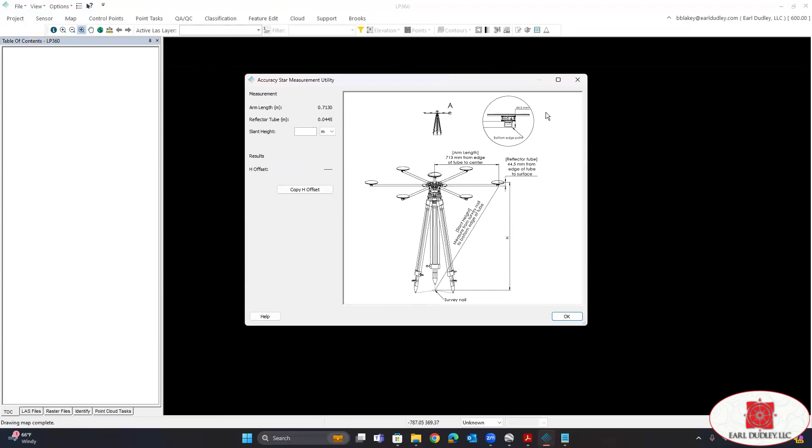We're going to be using that in our check shots. So when you get your H offset, we will add that to our, in this case, go back to—for this tutorial, we had our accuracy star set up just like in the diagram here.

We had our tripod and base set up over our control point. And with that being said, you can see right here, check shot number 100 is actually our control.

So we're going to add in 2 additional columns. We're going to have one column for the type AS, which is accuracy star, and column 6 will be the H offset. Now, if you include your control with your check shots, you'll need to make sure that every line has the same number of columns or it will not import correctly.

So here you can see we've got our vegetated shots. Here is our control. And then here are our check shots.

All right, we're going to go to sensor, cycle import. And we're going to import flights into new project. Next. Oops, got to make sure you choose TrueView / microdrones. Next.

Click the ellipsis, find a place to save the shape file. Next, delimited, next, select your delimiter, next.

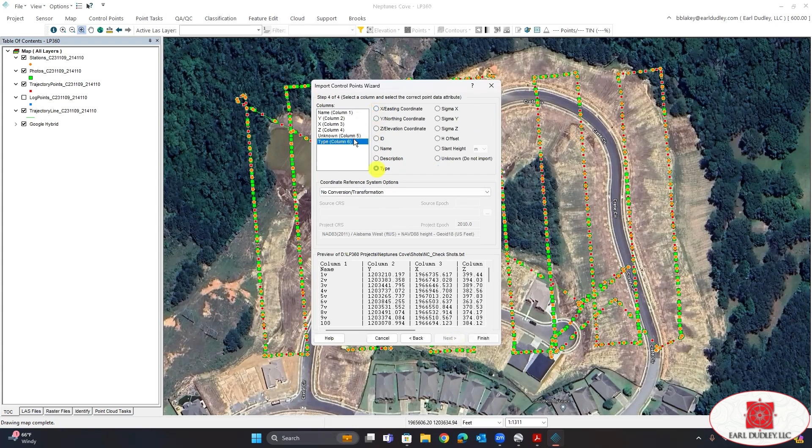And now we need to title our columns. So column 1 is name, 2 is Y, 3 is X, 4 is Z, 5 is type, and 6 is our H offset. Finish. There we go.

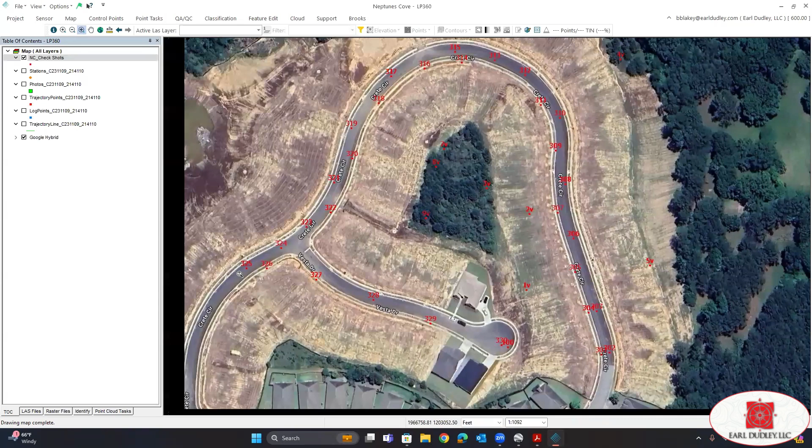All right, perfect. All right, next thing we're going to do is we're going to go back to the sensor ribbon menu, click trajectory processing.

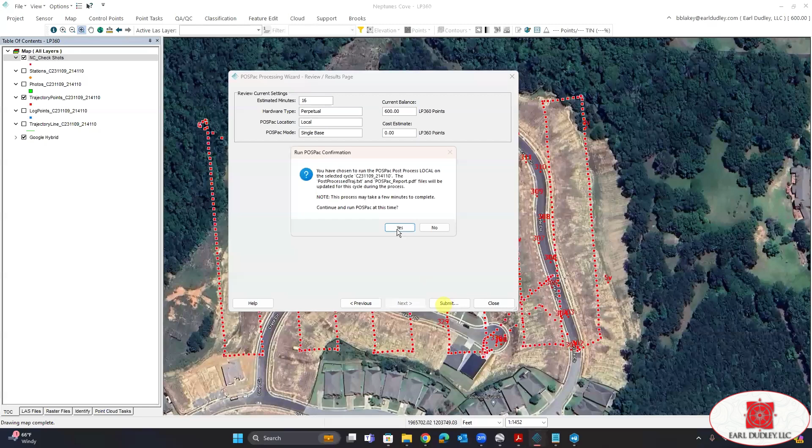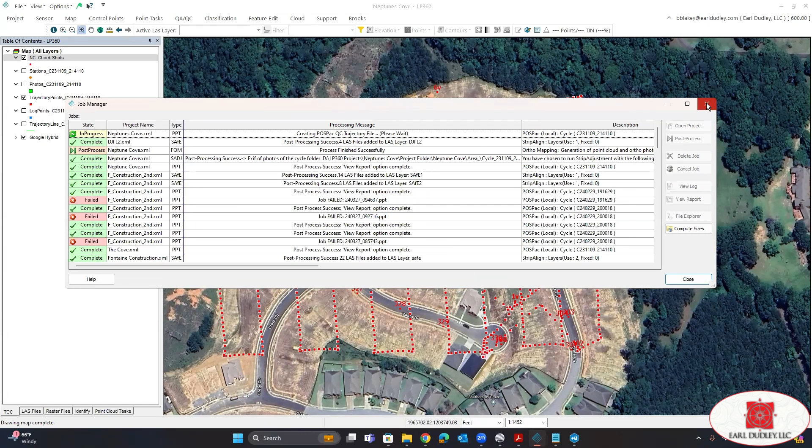Click next. Now we are going to enter our control point. All right, we see that trajectory processing is finished. Post process, we're going to highlight that, then click post process.

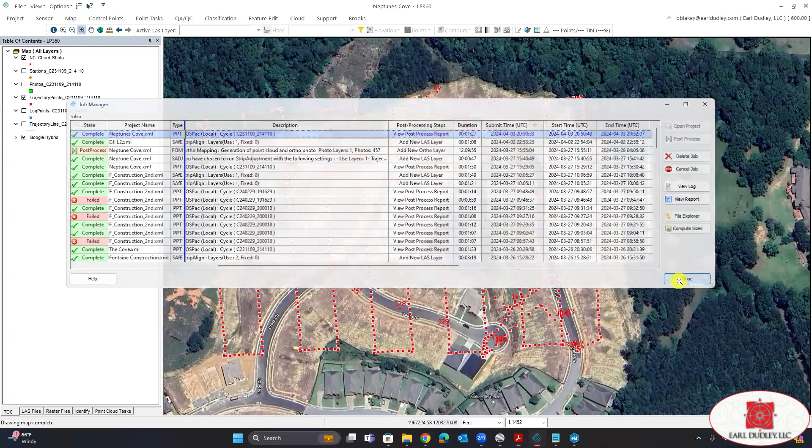All right, next thing that we're going to do is we're going to go create our flight lines. There's several ways we can do this, either auto create or manually. We click auto create. We're going to need to set up our minimum length, turn radius, and deviation. We did 150 feet minimum length, turn radius 10 feet within turn, and maximum deviation of the flight line 10 feet. We click compute. And we now have our flight lines.

Now, if you're not happy with what you see, we can just go ahead and delete these guys by going up to feature edit and then using our lasso. And I'm going to hold down the left mouse button. We click the delete key on my keyboard.

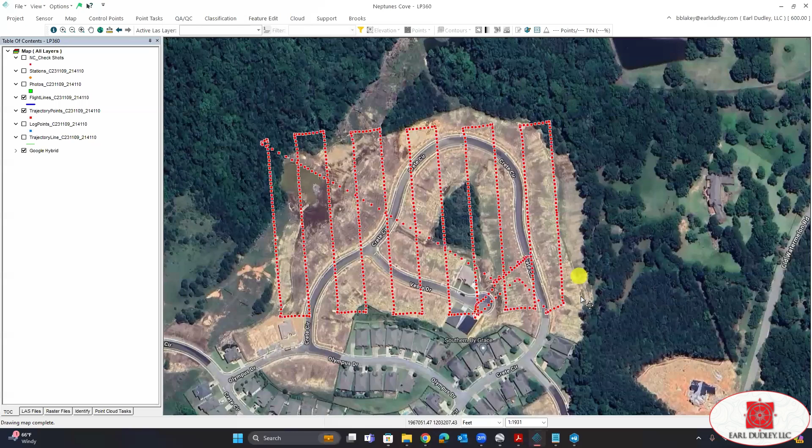Yes. And then now open up our trajectory points, and we can do this manually. Go to feature edit, select edit polygon. And I want to make sure that I got all my check shots in there. Yeah, I got some that are going to be pretty close right there.

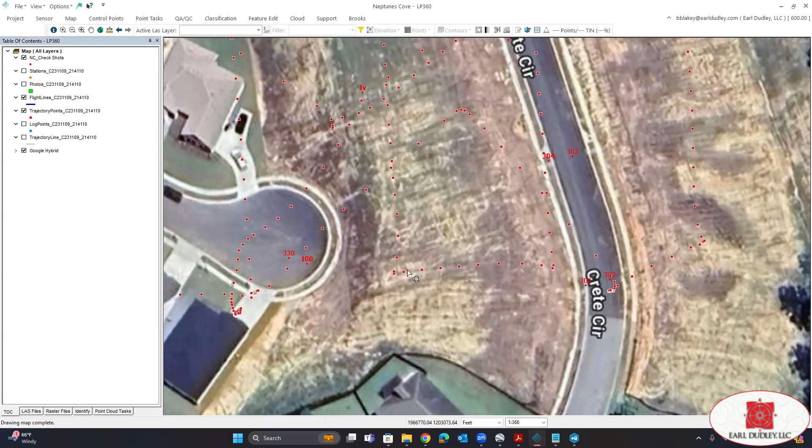So we're going to left click, left click, left click, left click. Oops. Make sure you got it selected here. All right, let's do this again.

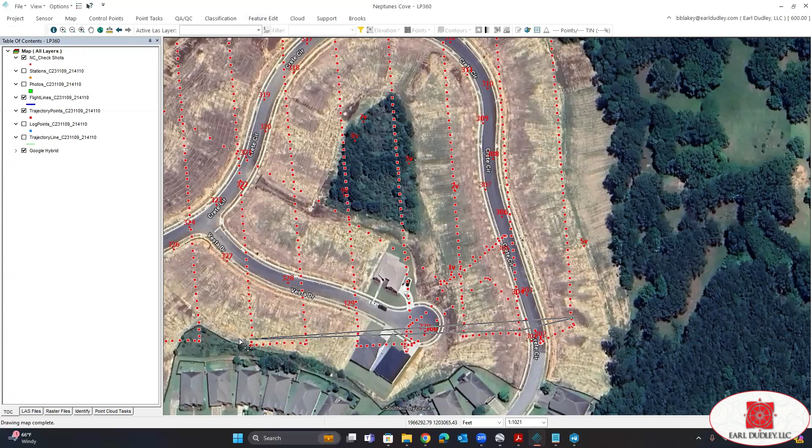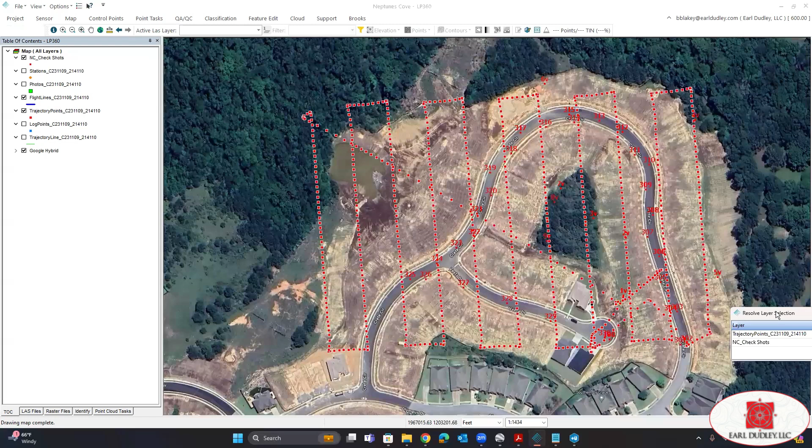When you're done, just double left click. I'm going to ask which layer do we want to select, and we want to select the trajectory points.

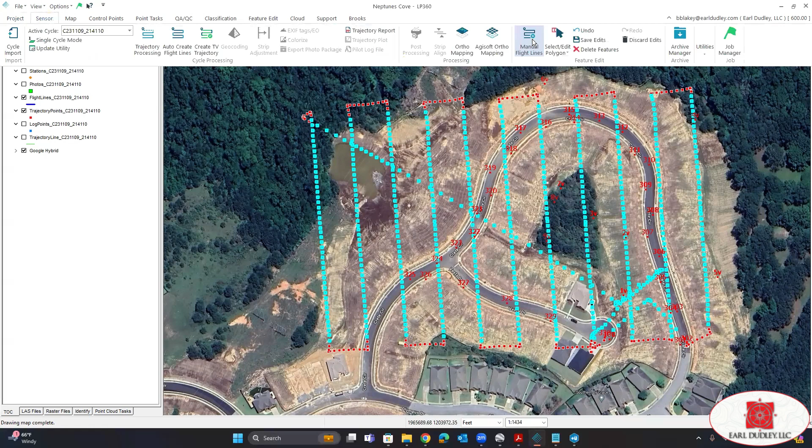Now we're going to go back to sensor... project. Where is it? It was moved. Sensor. And we'll see manual flight lines right there.

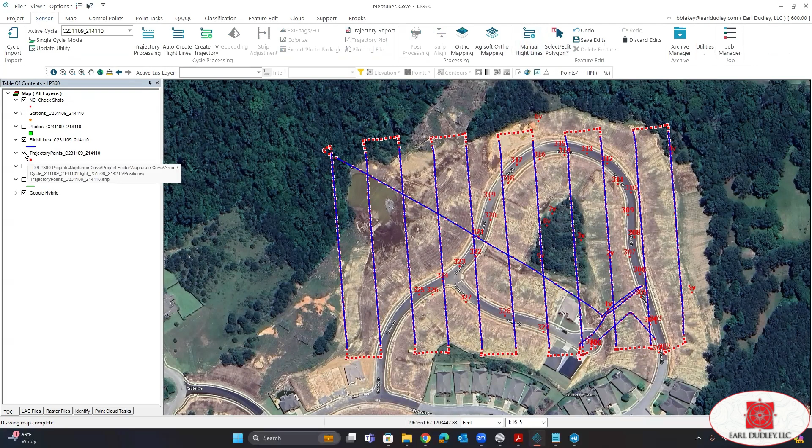There we go. What we want to do now is turn off the trajectory points in our table of contents on the left, and we want to get rid of these guys. All we want are these parallel lines.

Same thing, just use my feature edit tool. Tell it what we want to select, those flight lines. Hit delete on our keyboard. And then last, we want to go up to the feature edit.

We can see that our active layer right here is flight lines, and we want to make sure that we save that.

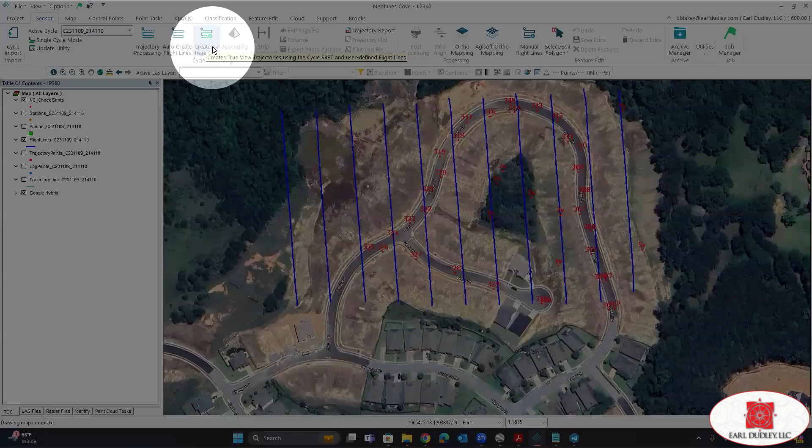Okay, we're going to go back to sensor, and then now we're going to hit create true view trajectory, create trajectories. Okay, you can see that our trajectory files have been generated. We're going to click OK.

Now, if you are using a third-party program such as Pix4D for your ortho, at this point, you can go ahead and export your photo package right here.

We can go ahead and actually, we don't need to do the updating of our EXIF tags because we did that when we created our trajectories. So we can go ahead and export photo package, find wherever you want to save it to.

And export photo package. Now we can see here's our photo package, and it's got all of your corrections ready to go. You would just import this as you normally would any other corrected data set into your third-party orthophoto software.

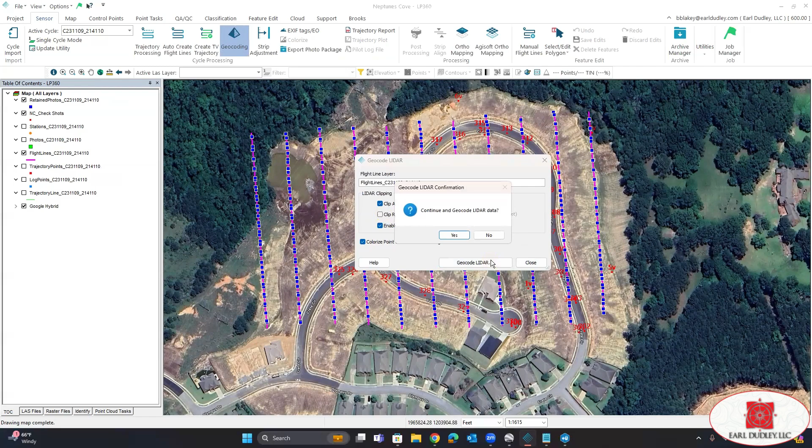Now we're going to turn off clip range, enable true track, and colorize point cloud. Click geocode LiDAR when you're ready, and yes. It's been generated. Next thing we're going to do now is run our strip adjustment.

So go ahead and click the strip adjustment icon. Tell it that we want to run it on our LAS layer that was just generated.

We're going to use the same clip angle. Really, we're not going to change anything here, but just give it a different name. And I usually just call it the adjusted point cloud.

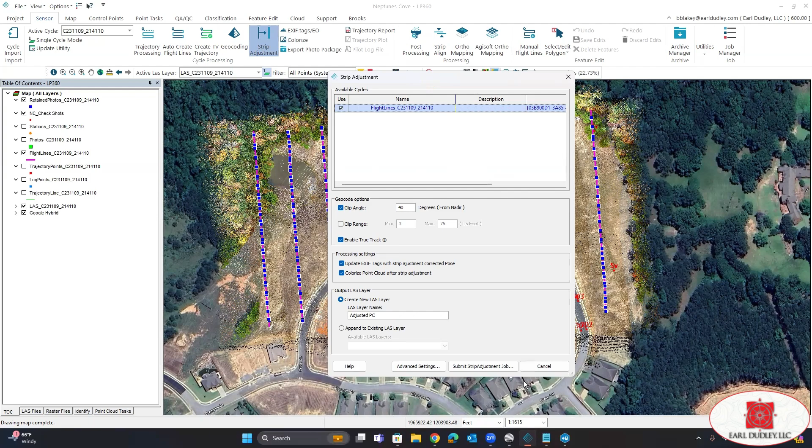Submit strip adjustment, and yes. All right, we can see in our job manager that our strip adjustment is completed.

Highlight it, and then click post process. All right, see our trajectory file has been generated.

Now we can see down here in the bottom left-hand corner, it is now geocoding our point cloud. All right, we can see that we've gotten a success, so we're going to click OK.

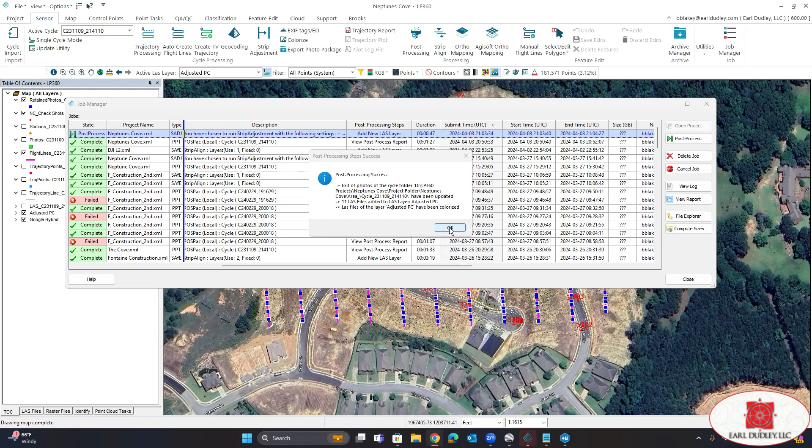And we are ready to close our job manager. And if we look over in our table of contents, we can see our new point cloud. And our active layer, we have our adjusted point cloud as well.

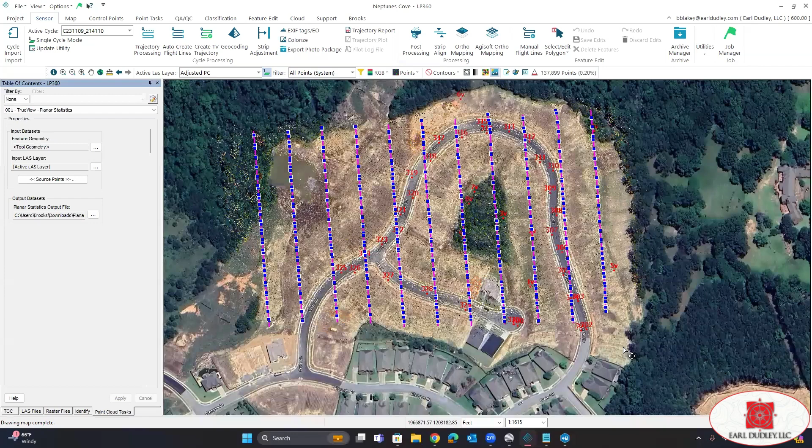All right, next step we're going to run is our smoothing. However, before we do that, we can go ahead and import our border, or actually create one, and then we can run our smoothing task afterwards.

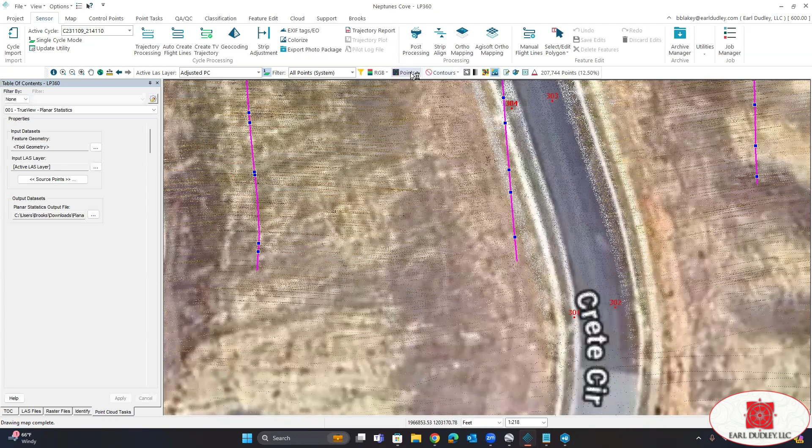Okay, to create a project border, we're going to go to Feature Edit, create feature layer, browse, and set up a location where we want to have our border.

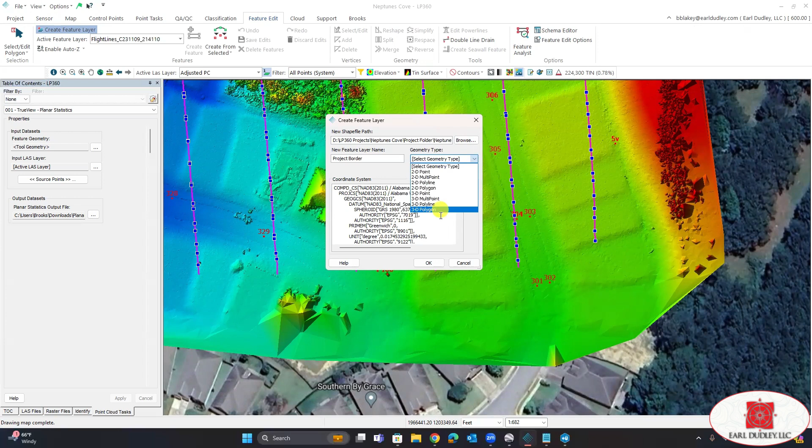And our geometry type is going to be 3D polygon. Next thing we're going to do is click Create Feature, and left click wherever you want to start your project border.

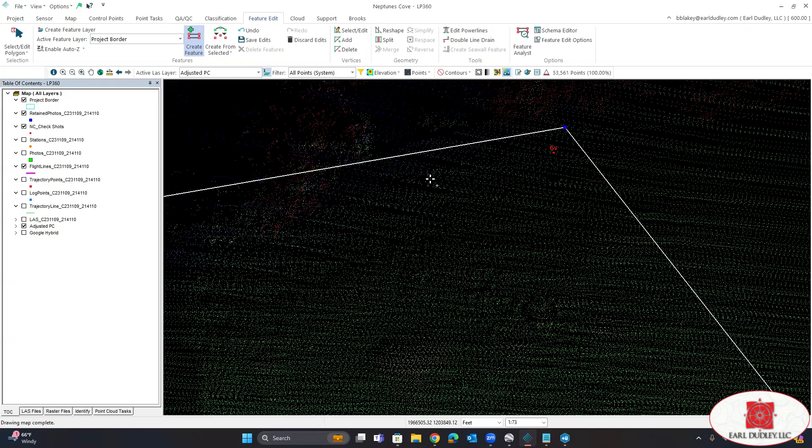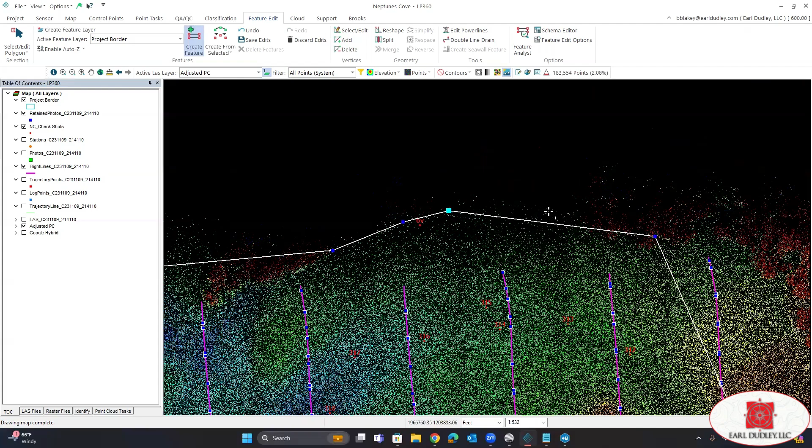Then when we're done, we'll just double click and then go up here to save edits.

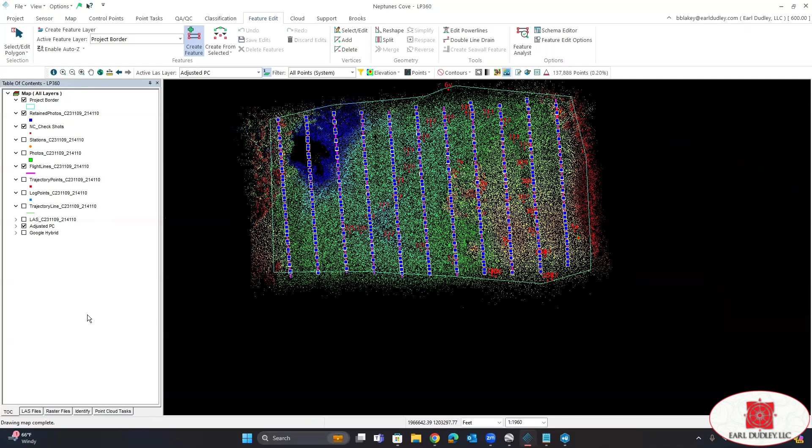All right, next thing we're going to do is go back to our table of contents, click point cloud task, and then a drop down menu. We're going to select the smooth point cloud task.

Click the ellipsis here. We want to make sure we have shape layer and the shape file that we just created. In this case, it is project border.

Active las layer, which is going to be the adjusted point cloud. And then our source filter, we just want to make sure all points are selected. If they're not, just in the drop-down menu, select all points.

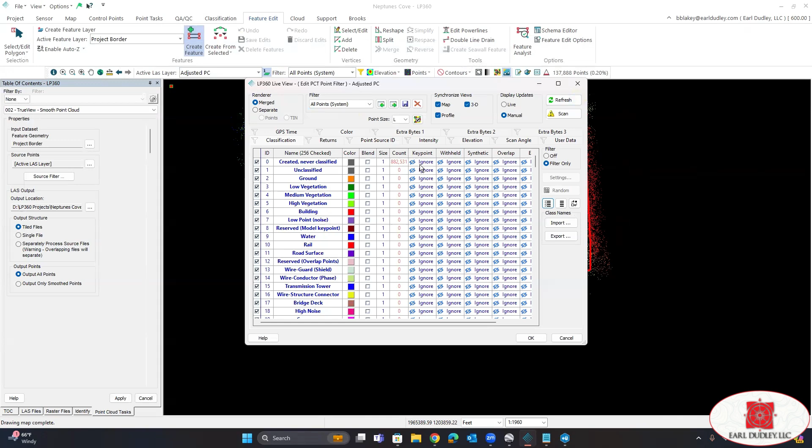If we hit the refresh, we can see nothing has been classified. Now we're going to set up an output location.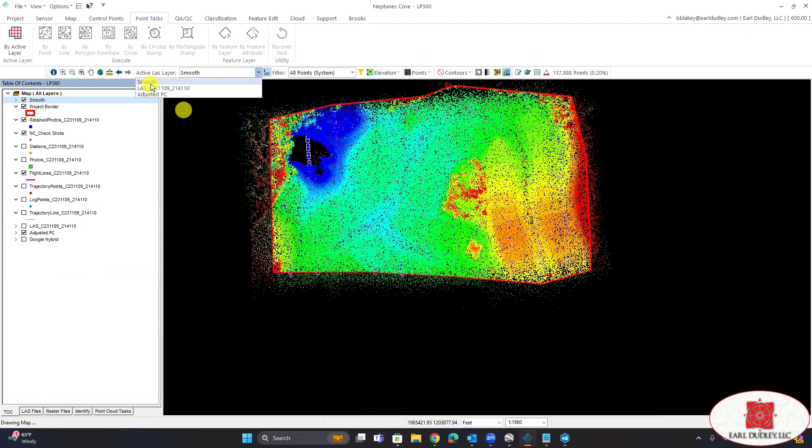Now we're ready to start checking our accuracy. We're going to go to control points, accuracy estimation, settings, source points, and we want to make sure all points are selected. Since nothing's been classified, we can also choose created never classified. Our radius, we'll do 1 foot, click OK.

The first thing we want to do is tie everything into our control. So in the drop-down menu here, we're going to find our accuracy star. There it is right there. Now click auto find. We can see that LP360 found our accuracy star, and we have very good, reliable results. Actually, we're tied in pretty close already.

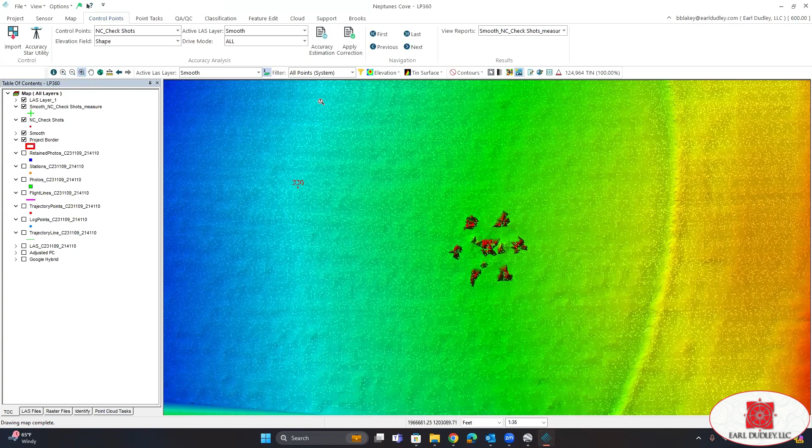To get everything tied in precisely to our control, what we're going to do is just click solve, then apply correction. Click OK, and we look over in our table of contents, we can see that we have our corrected las layer. So in the drop-down menu, we're going to select las layer 1, then come over here and rename this guy. I'll call it corrected accuracy star.

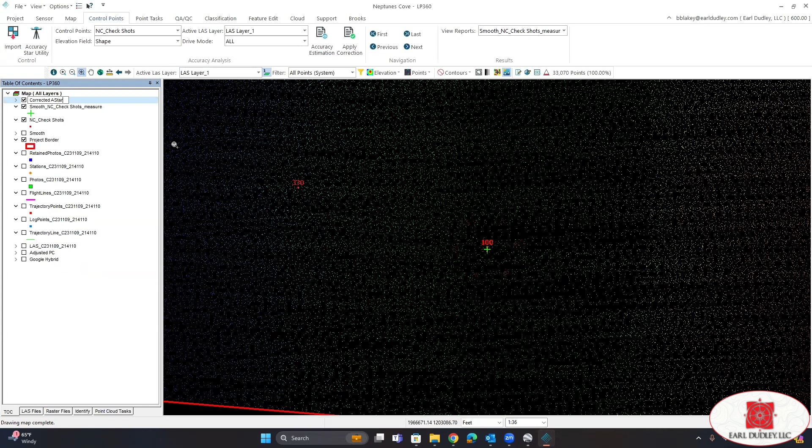We're going to run this again, just to confirm everything tied in the way it should to our accuracy star. Everything looks pretty good. So the next thing we're going to do is in our drop-down menu here select full check and auto find.

Look at our mean error, it's right around a half inch. Deviation is around a hundredth. Our vertical spread is just under six hundredths. We can see our minimum and maximum error, both of which are within the accuracy of the sensor, our error range. We have our RMSE, our accuracy class, and our contour interval.

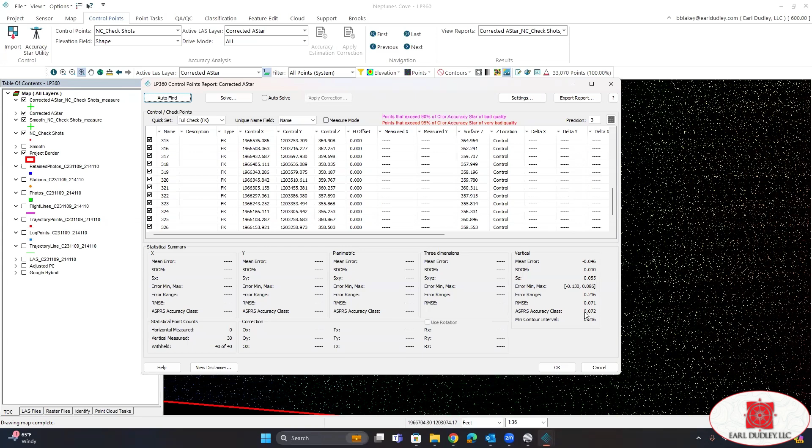Just to confirm, the way this RMSE is calculated has not been updated with the latest ASPRS accuracy standards that came out in August of 2023. So to get that, we would square our RMSE of our check shots, square the RMSE of our data set, add those together, and then get the square root of the sum.

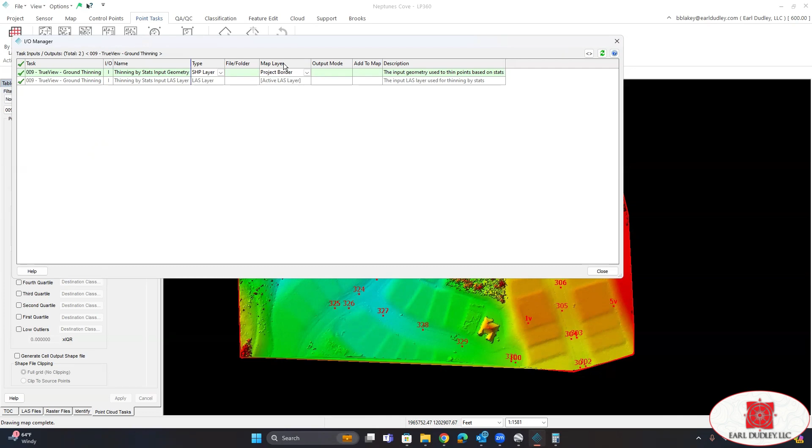Okay, we're ready to go ahead and begin classifying our point cloud. We're going to click Point Cloud Task, and in the drop-down menu select ground thinning. Feature geometry layer is going to be the shape layer and the name of your boundary. Units meters. We want to have active LAS layers selected, and the source points we want created, never classified.

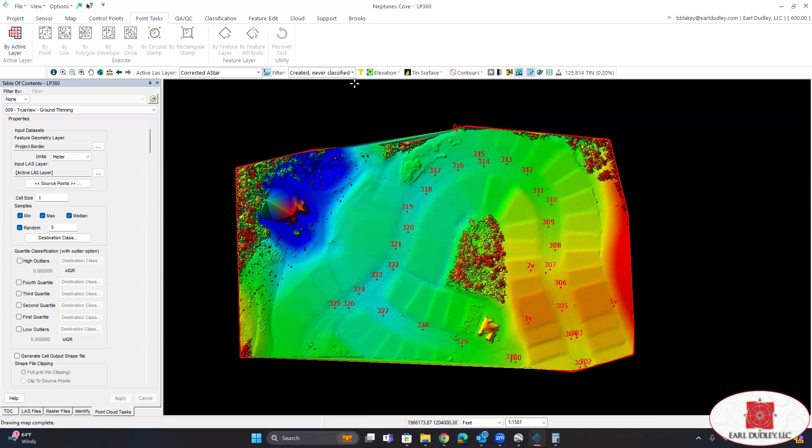We want to have cell size of 1 square meter, and we want 8 points per square meter: minimum, max, median, and 5 random points. Go ahead and click Apply, and by active layer. Click OK. And if we go over to our filter and select Ignored Ground...

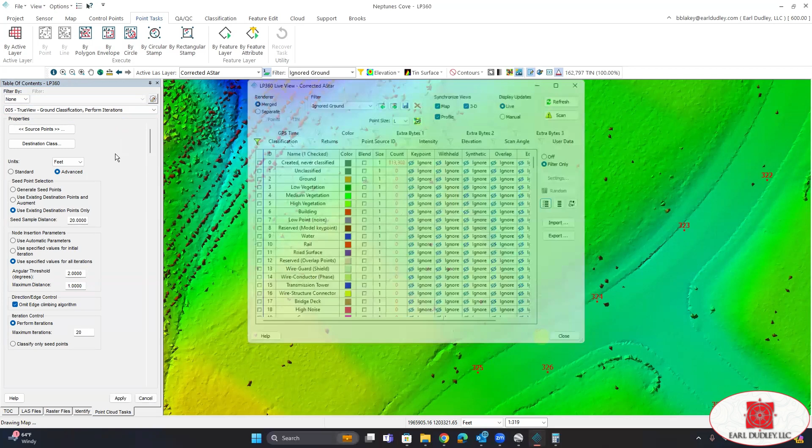You got rid of quite a bit, but still a lot going on here. So what we're going to do next is go to ground classification, perform iterations. Source points is going to be ignored ground. Destination class is going to be ground.

We want to generate seed points with a sample distance of 20 feet. Angular threshold, 2 degrees, distance 1 foot, omit edge climbing algorithm, and we want to perform 20 iterations. Go ahead and click Apply and execute by active layer.

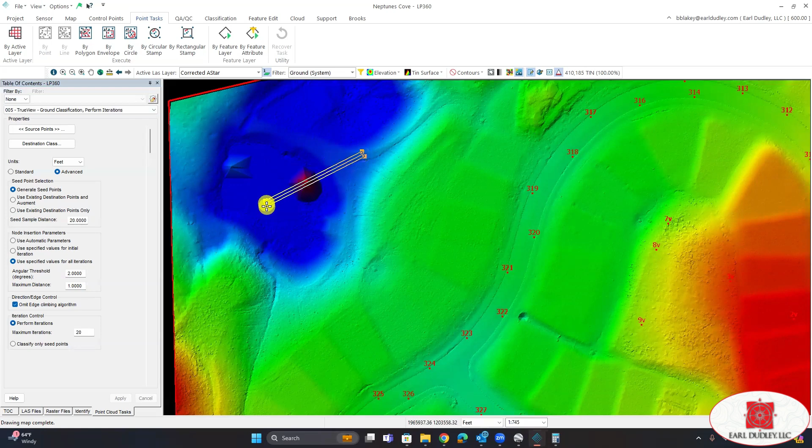Now when we change our filter to ground, just to get rid of these last few bits of vegetation, I'm going to click Draw Profile Line. Now I'm going to left click, use my mouse wheel. There's a point up here somewhere.

There it is. To get rid of that guy, our filter is going to be ground. Source is all points, and our destination will be unclassified.

Next, we want to select the classify above line, and there's the point we want to get rid of. So I'm going to left click, draw a line underneath it, double left click, and then hit the number 1 key on my keyboard.

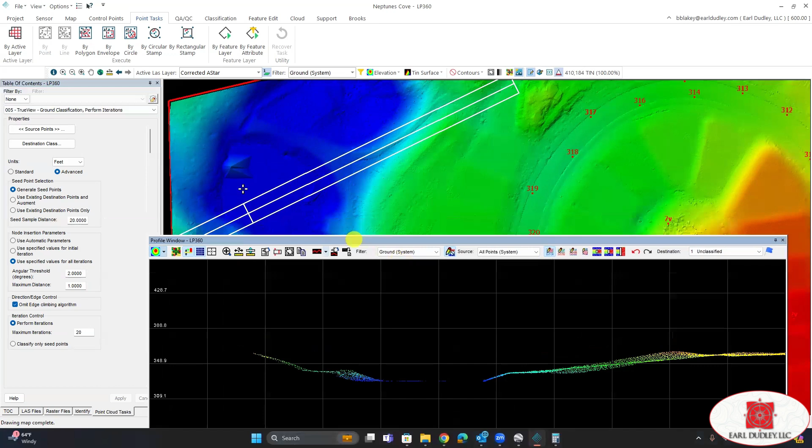And now that reclassified that point as unclassified. So I'm going to go through here and real quickly clean the rest of this up, and we'll be ready for the next step.

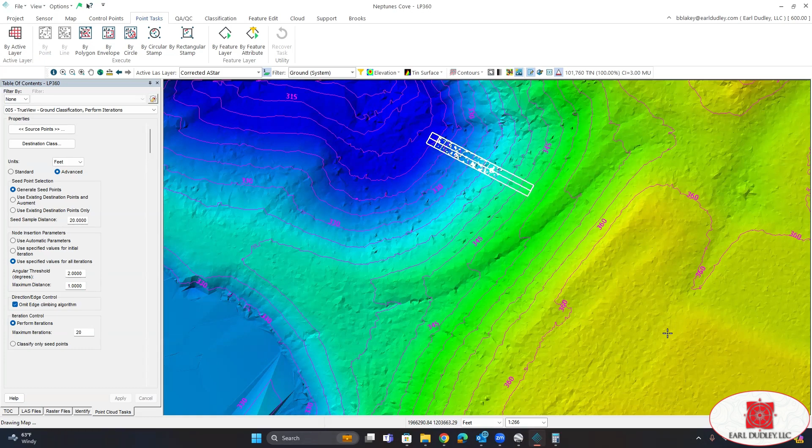So the next step is we'll notice that we did miss a few spots, especially some areas that have sharp edges, such as jogging trails or trestles, things of that nature. With this particular project, we had some piles of, I believe it was some dirt over here.

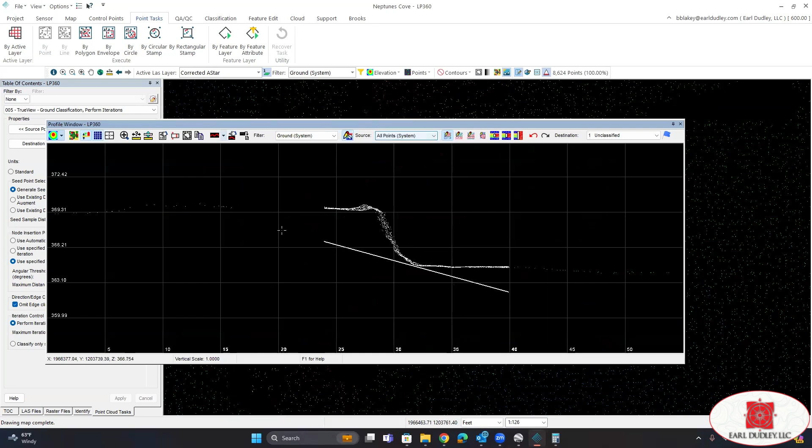And if we turn our points on, and then turn off our contours -- oops, there we go -- I can see that we've got some missing areas, and I'll really be able to see it if I draw my profile line. And we can see that we missed that. So it's really easy to fix.

We're going to use the same tool that we did to classify this, but instead I am going to change my seed sample distance down to around 2 feet. Click apply. And instead of executing by the entire layer, I am going to execute by... I can really use just about any of these, but we'll try the circle here. There we go.

So now when I draw my profile, I can see we're able to get that back in. And if you're not satisfied with the results, we can just make the seed sample distance even a little smaller if needed. We can try even by envelope, and I think that should do it.

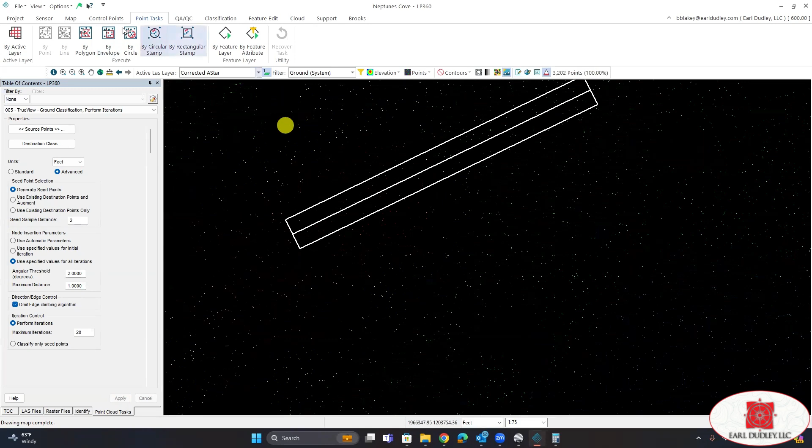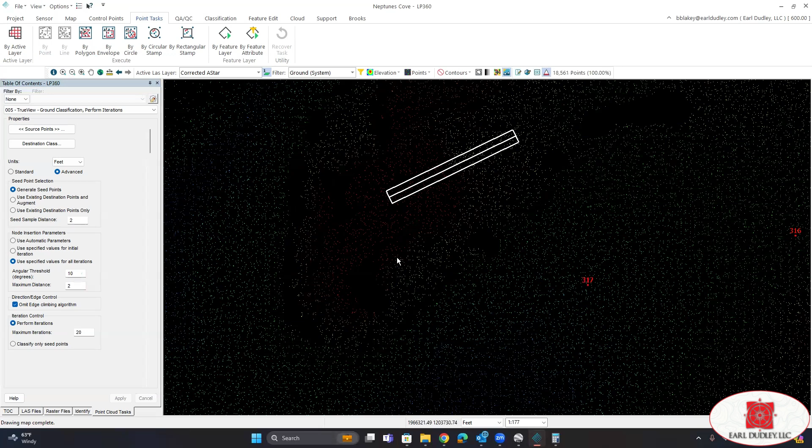Now, sometimes if you've got a really steep angle, you may need to adjust your angular threshold. So we can even try, say, 10 degrees, and maybe even go 2 feet. But you just got to be careful with this, especially if you're in vegetation. This is wide open, so I'm not too worried about it, but if we're in vegetation and you start getting really aggressive with these angles and distances, you could run the risk of inadvertently classifying vegetation. Again, this is fairly open, so I'm not too worried about it.

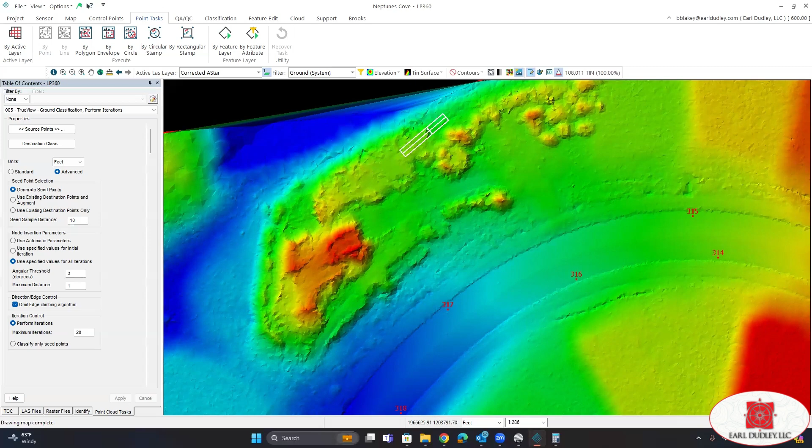Okay, now that we've got the point cloud cleaned up, there'll still be a couple spots here and there that if you put your mind to it, I'm sure you could find stuff you need to clean up. But if you've ever done point cloud classification, you need to know when to say when, because it can definitely be a time robber, no doubt about that.

But we are ready to go ahead and thin this guy out one last time. So we're going to go back to our table of contents, and in the drop-down menu here, we're going to go select ground thinning again. This time we're going to select source points as our ground, there they are, and destination is going to be model key points.

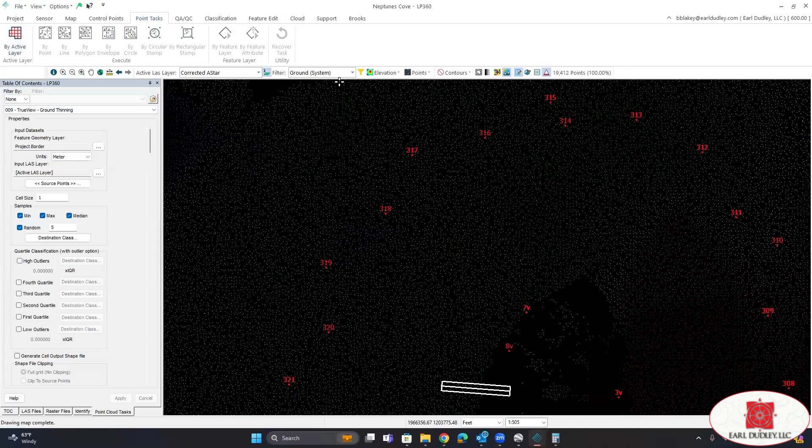Wanted to do 5 points per square meter. Go ahead and click apply and execute by active layer. Change my filter to reserve model key points.

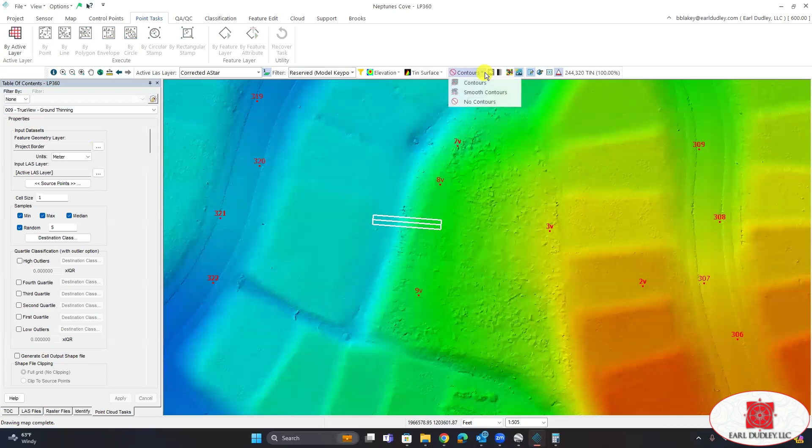Change to TIN surface, and we're going to now turn on our contours on demand. And then over here in our table of contents, we're going to go to our point cloud right there. We're going to right click, go down to properties, symbology, contours.

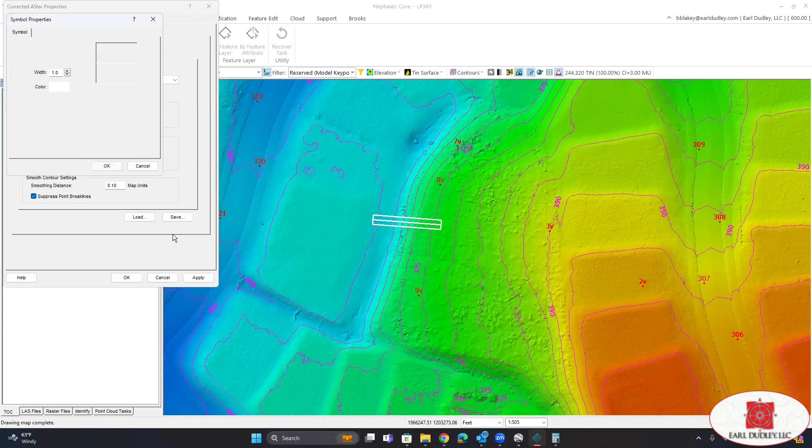And you're going to change this to whatever contour interval that you're going to use. Then your smoothing distance, I usually use 0.10, change that to map units. And I like using the white, they're a little easier to see. Okay, and apply.

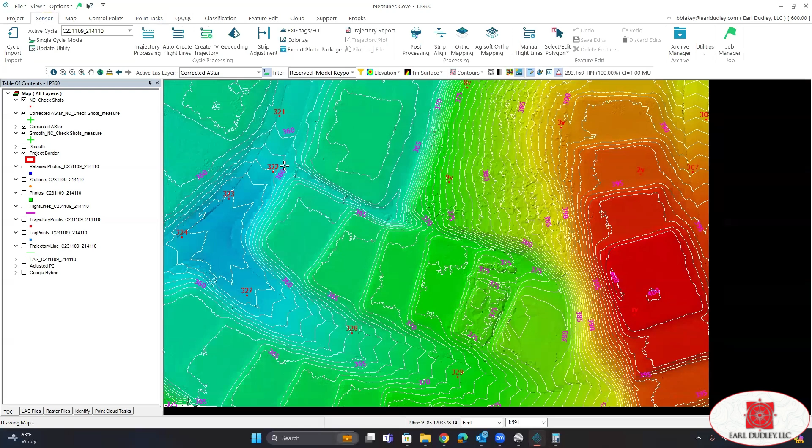So now we can use these to go through one last time and see if there's any areas we need to clean up. We need to check our horizontal. There are several ways we can do this. For those of you that have the Agisoft add-in, let me turn these off real quick.

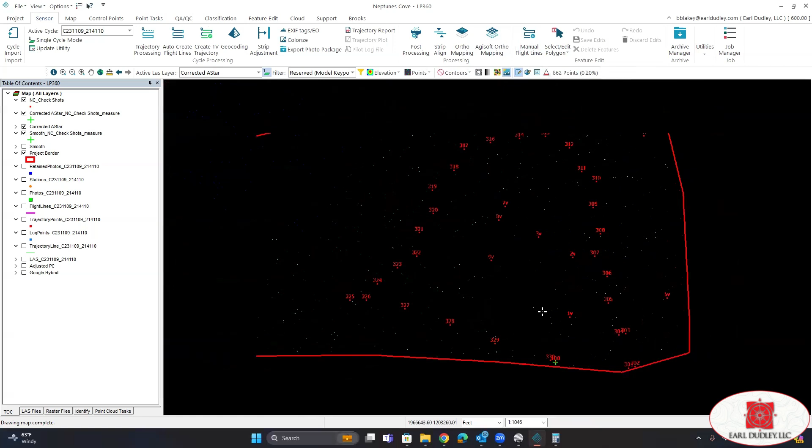We're going to create an elevation model and then create our ortho from that elevation model. So we'll go to Project, Export Wizard, Surface, and then select our model key points.

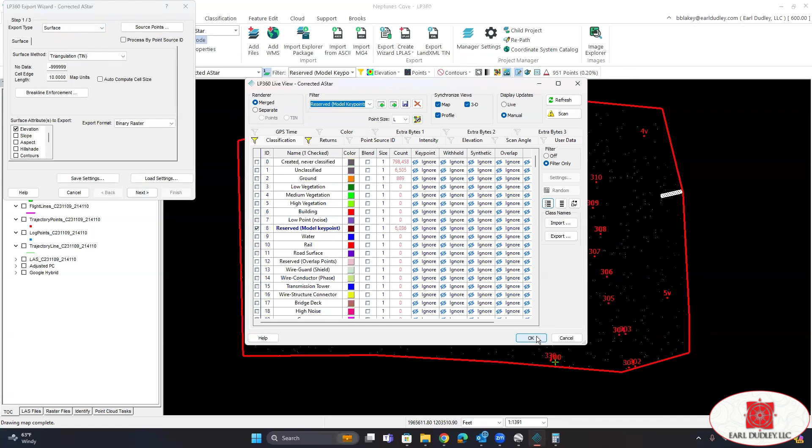We'll do a 1/4 of a foot cell edge length. Export format will be GeoTIFF. Make sure elevation is selected and click next. Cookie cut a polygon - there's our project border. Click next, find a spot to export it to, then click select finish.

Once you have your elevation model, we're ready to create our ortho. From the sensor ribbon, select Agisoft ortho mapping. Retain photos, we want to generate ortho from DEM, and give it a name. If you want to go into advanced settings, you can.

Really, the default settings should be fine. Now if you have a really large project and end up creating an ortho that's maybe too big to manage, you can decrease that size. Just come in here, unselect optimal ground sample distance from images, and put in a higher ground sample distance that will lower the resolution as well as the size of the GeoTIFF.

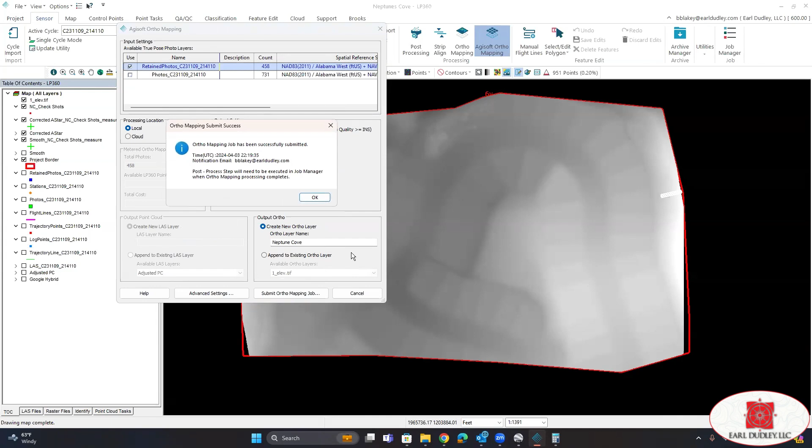Once you're ready to submit, just click Submit Ortho Mapping Job, then click OK. Another good thing about this workflow is it will create your ortho in a fraction of the time. If I can find one here for this project - with 8.5 minutes, I've already got it created. I'm going to go ahead and bring it in.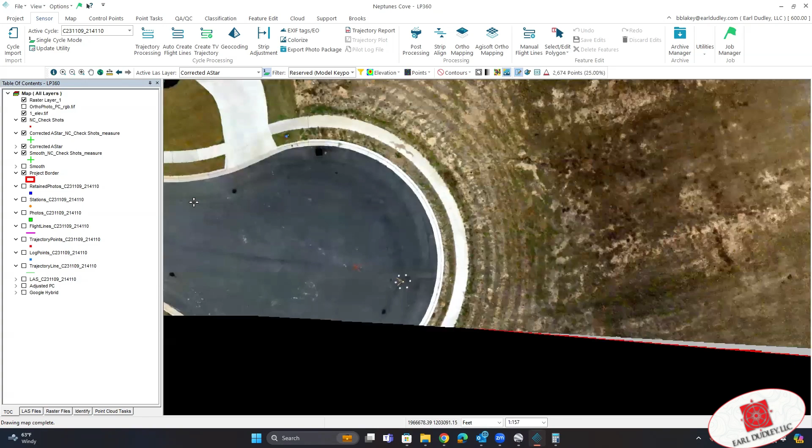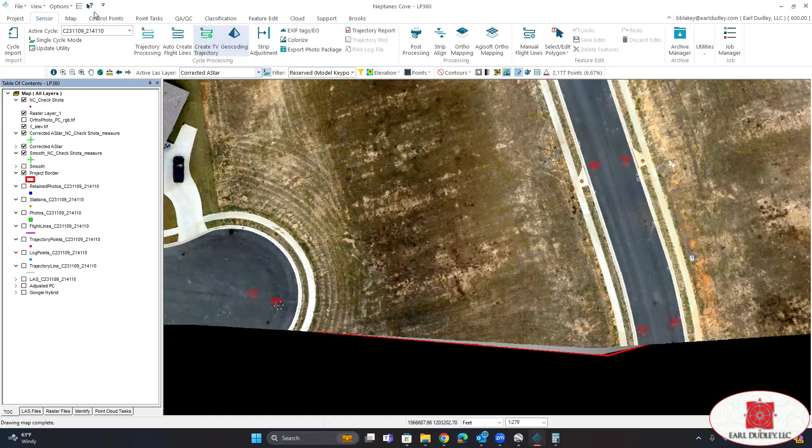So for horizontal, we've got our ortho that has been imported. We're going to bring in our check shots top, and now go to Control Points, Accuracy Estimation. We want to go to our full check. Click auto, and for horizontal we want to select measure mode.

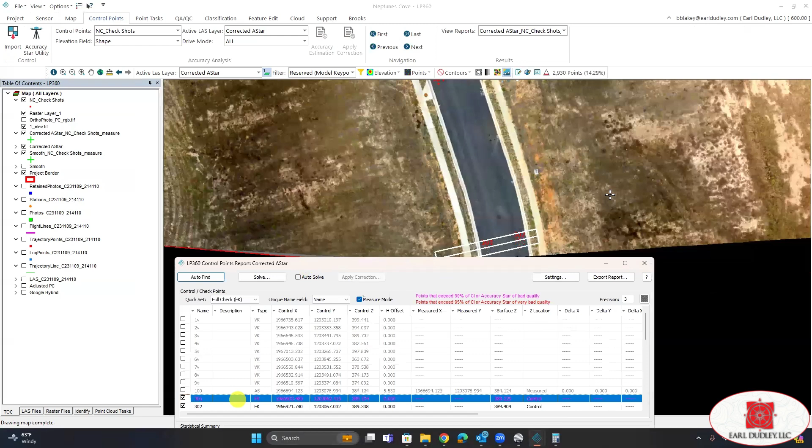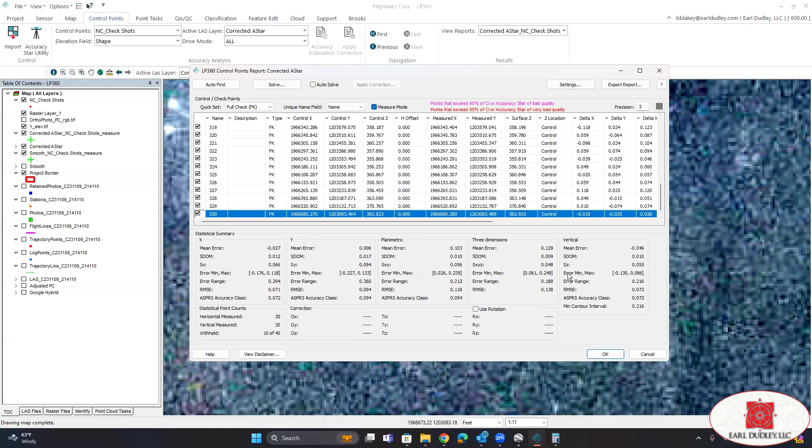I'm going to start with our first check shot, which is 301, and we're just going to click the center of the target. Once we have everything completed, you can see we've got our final accuracy right down here at the bottom. To export your report, just go up here to export report, give it a name, and choose wherever you want to export it to.

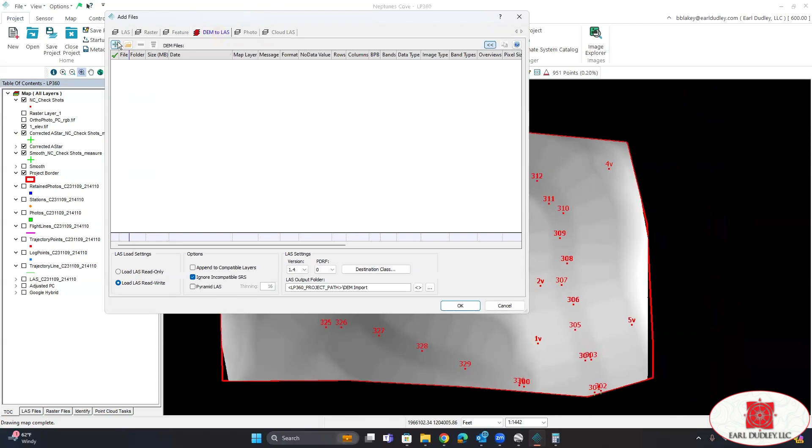Our DEM, we are going to export this as a LAS layer. So we'll go to Add Files, this time select DEM to LAS, and then go find our DEM right here, and click OK.

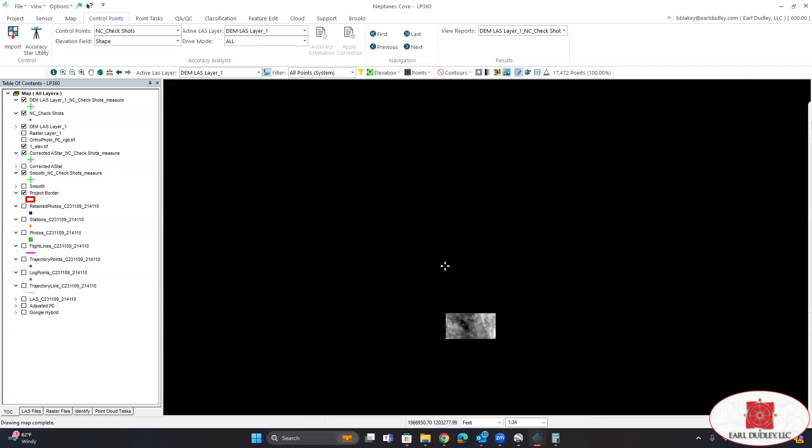Okay, so the last step is to export our final deliverables. So to do that, for our surface, we're going to go to Project and Export Wizard - I'm sorry, we're going to go to Project and Export LandXML. You can choose, oops...

Choose your classification or your filter, and then the maximum number of points in millions you want to use. Then find an export location.

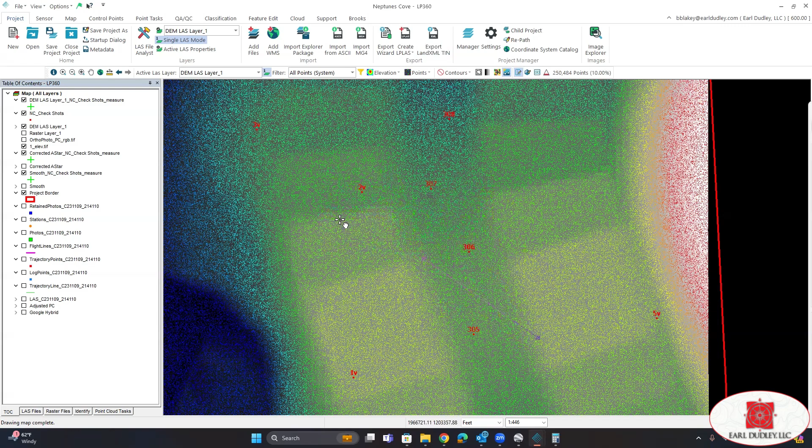Once you have your surface exported, we can now go to our - change this back to our - oops, got to turn this off - our model key points, which was right here.

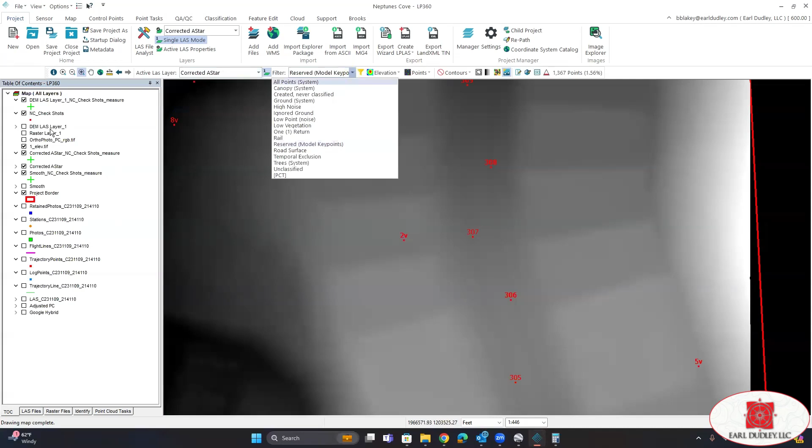We can export our contours. To do that, we're going to go to Project, Export Wizard. We're going to change our cell edge length to 1/10. Choose our source points, which is going to be model key points.

There we go. Change the attribute to export to contours, then click on the Contours tab and enter the interval you want to use. We're going to smooth our contours, and we'll smooth them by 1/4 of a foot.

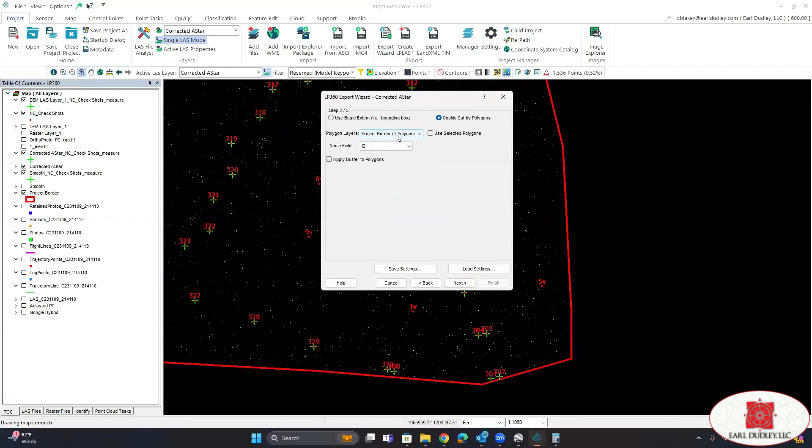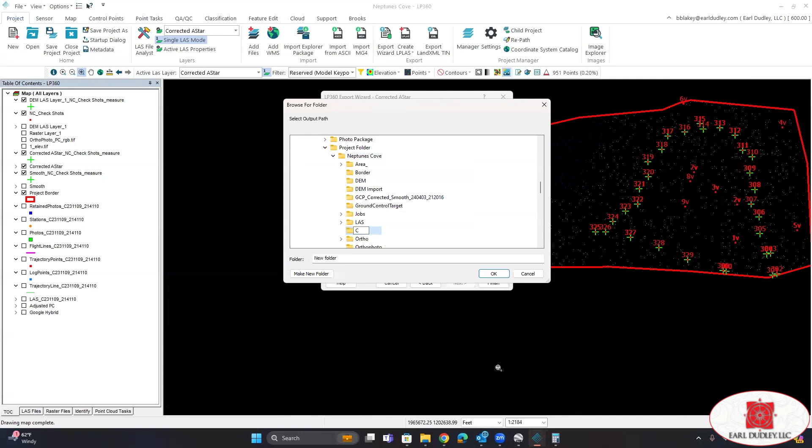We're going to export by polygon, so we're going to keep everything within the polygon here. Name field will be ID. Click next, find an export location, click OK and finish. All right, we see that we've got our contours finished.

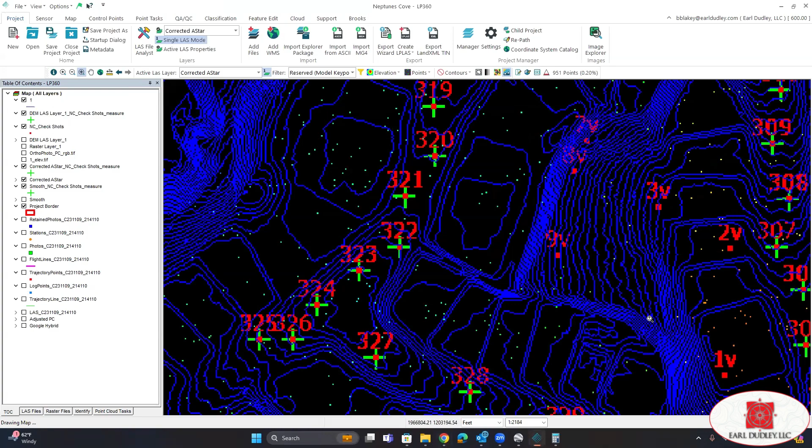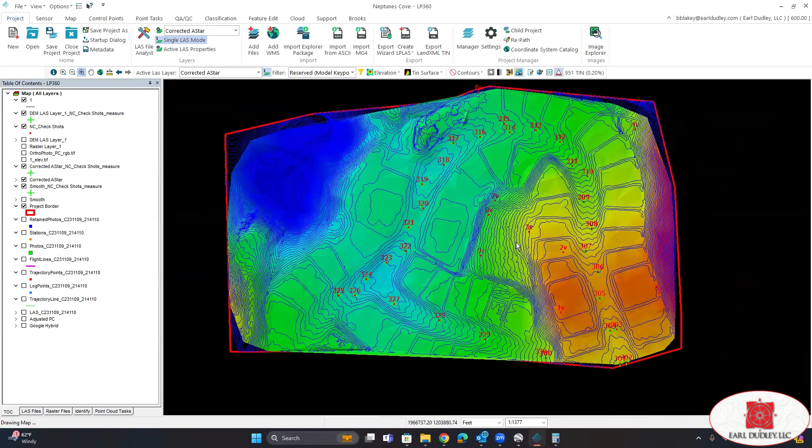Again, I'm not too worried about that because in a later tutorial we can go over how to enforce breaklines for this retention pond. Okay, that has been the workflow with LP360.